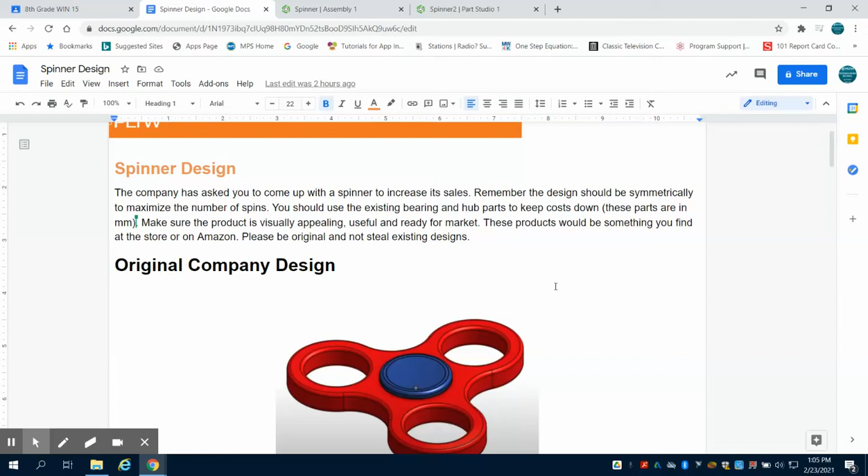So in this project, we're going to be asked to design a spinner. The company has asked you to increase their sales. Remember, spinner design should be symmetrical in order to increase the amount of spins that they have. And in order to keep costs down, they're asking you to use the same bearing and the same hub for the bearing. So what you're really being asked to design is the spinner portion.

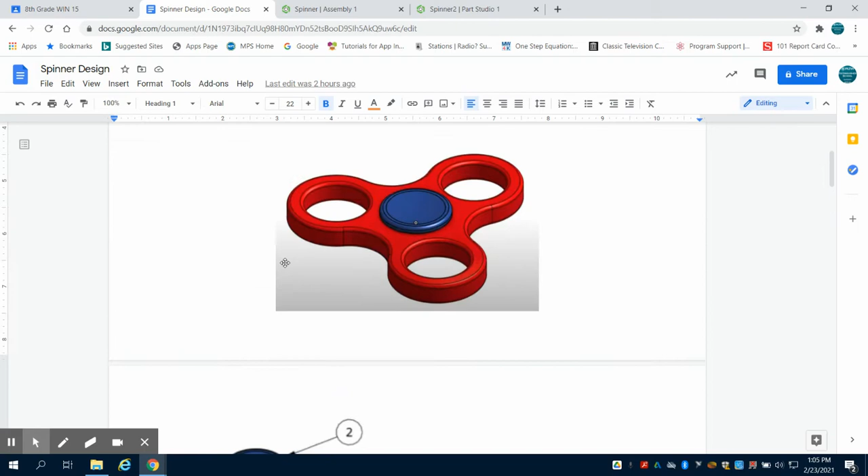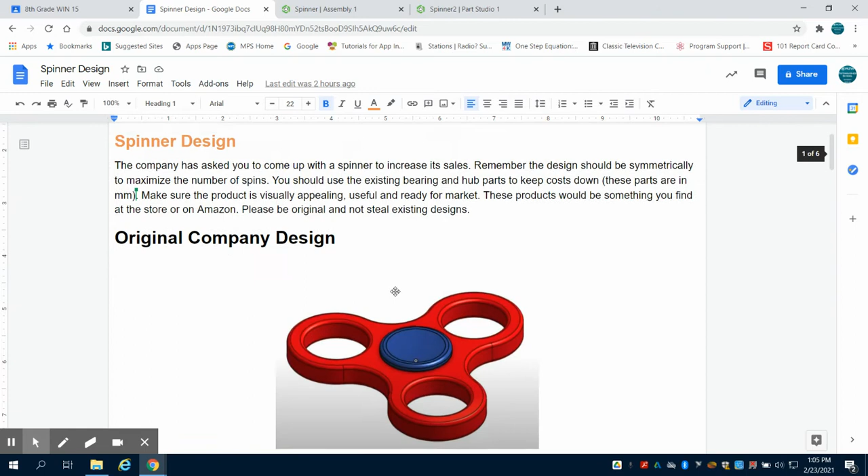I'm going to walk through how to design the bearing hub, and then the default spinner that the company already makes, how to assemble them and animate them so you can create your own design. Remember, your design should not be a rip-off of an existing design, but you should come up with something new that would increase the sales for the company.

So when it's all said and done, what it should look like, we can see we have this spinner here that is doing exactly what it should do, and that is spin. And our goal is to create this, so we can see that here.

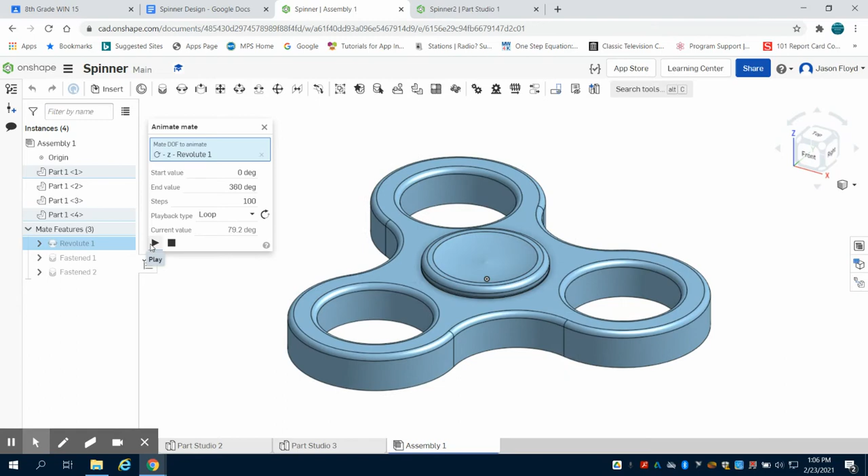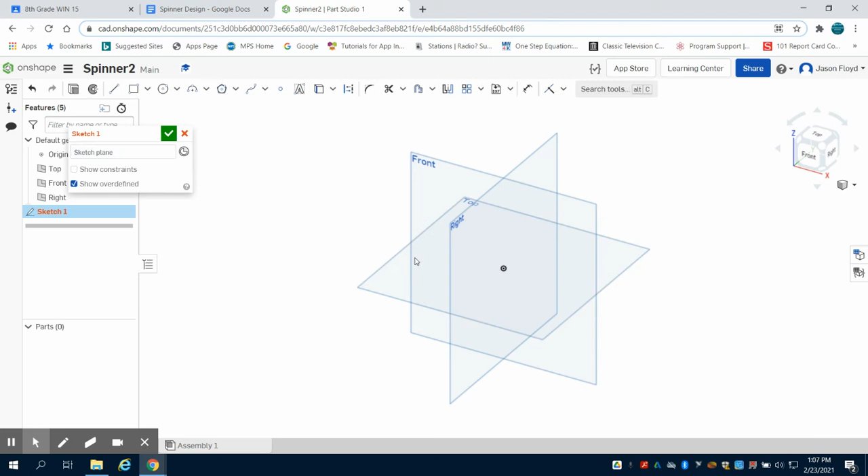So we're going to go over and take a look, and the first thing that we're going to create is this bearing right here. So we're going to go over to a new part studio and a fresh page here, and design that bearing. We're going to put a sketch down, laying it across the top right here. Then we'll orientate ourselves. We're going to grab our center point circle tool, and we're going to draw a 22 millimeter circle. So make sure we go up here to our workspace units and make sure that we change that to millimeter. Again, the three lines here.

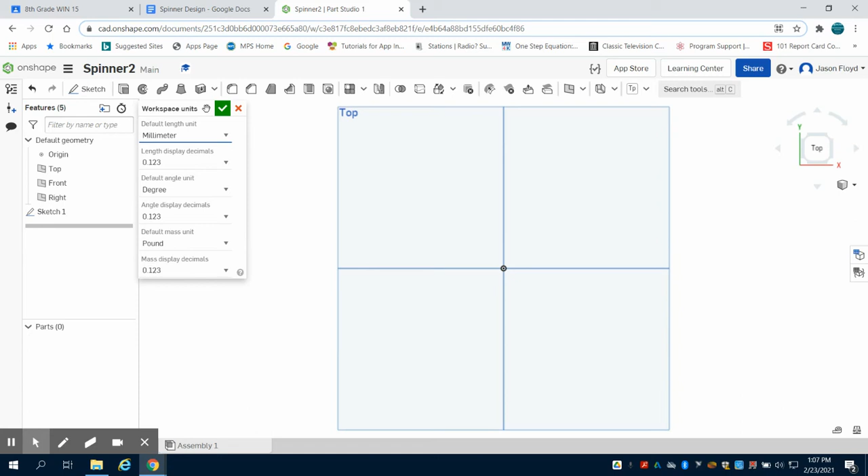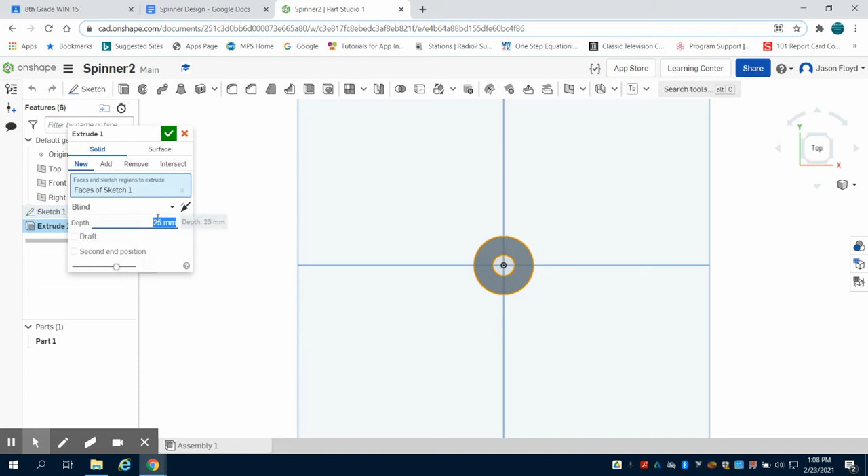I'm going to go back into that sketch now and use that center point circle and do a 22 millimeter circle. Because there's an 8 millimeter hole in the center of this, I'm going to draw on that center point an 8 millimeter hole, and then I'm going to extrude this to the part specifications, which is 7 millimeters. So what we can see is we've created our bearing here. I can right click, rename this bearing, and I can also right click and edit the appearance to change this to be whatever color I'd like it to be. So now I'm going to come down here and create another part studio,

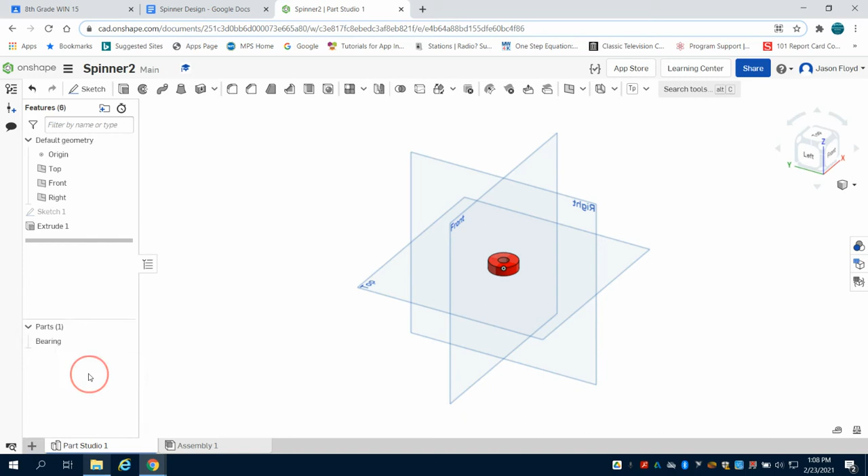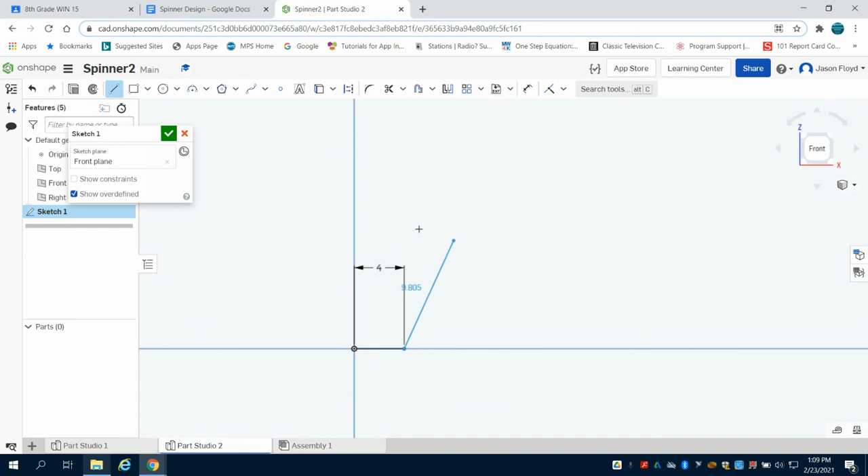and I'm going to create my hub, as they call it, the bearing hub. So we can see here, I'm going to draw this in the side profile view here and revolve it fully. You could draw it in the complete profile view and then revolve it a half profile, but I'm going to do it like this. So I'm going to do 4 millimeters here to the right. Then if I look up, I'm going to go 3 millimeters, and then it is 1 millimeter to the left,

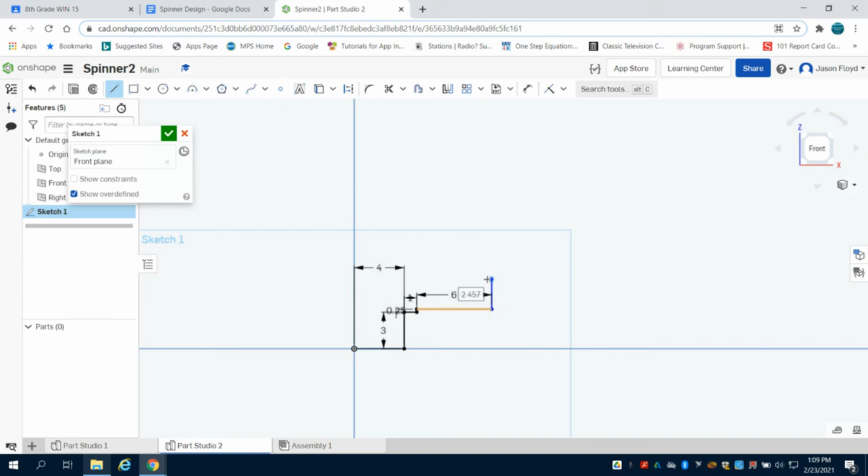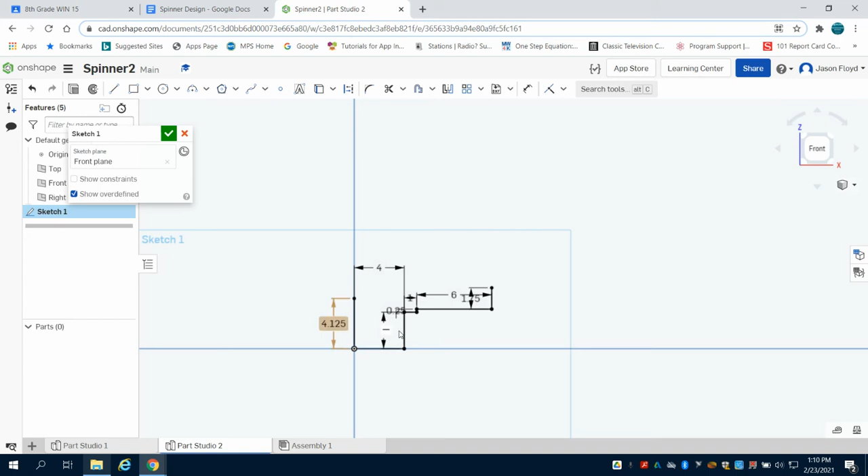0.25 millimeters up, 6 millimeters to the right, and then 1.75 millimeters up. So I'm going to exit out of this. My center line on this, so going up from here, is 4.125 millimeters. So I'm just going to hit escape, and I'm going to pull out my dimensions so they're a little bit easier to see for you, a little bit more organized.

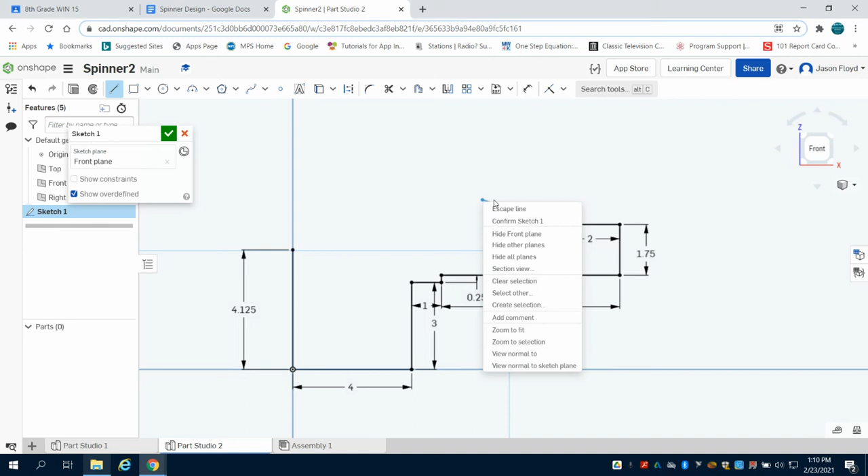Now the next line that we have to draw is a 2 millimeter line coming to the left. And if we take a look at the diagram, there's an arc from this end of the 2 millimeter line to the end of the 4.125, and this arc itself is 17.5 millimeters. So we can see here, I'm just going to drag that up so we can see it. Here's the schematic for this. So once we have this, all we're going to do is a simple full revolution.

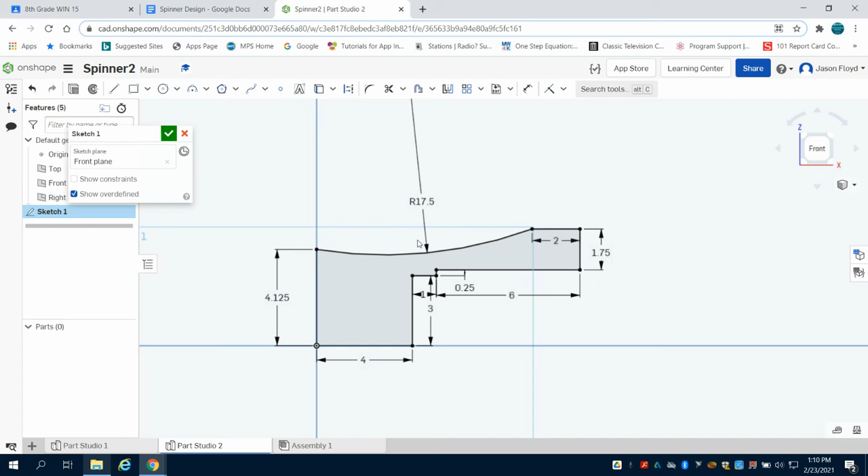So I'm going to come up here, I'm going to click on revolve. We're going to select the face here around the axis, which gives us our full revolution, as we can see here. Then they ask us to fillet the outside edge 1 millimeter. And then the bottom edge, we're going to chamfer 1 millimeter. So we can see that